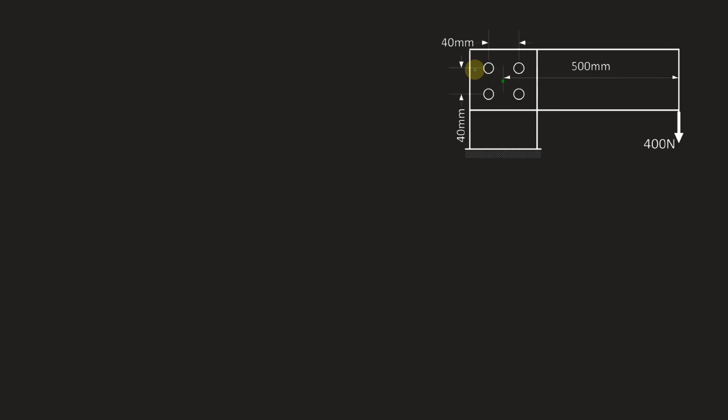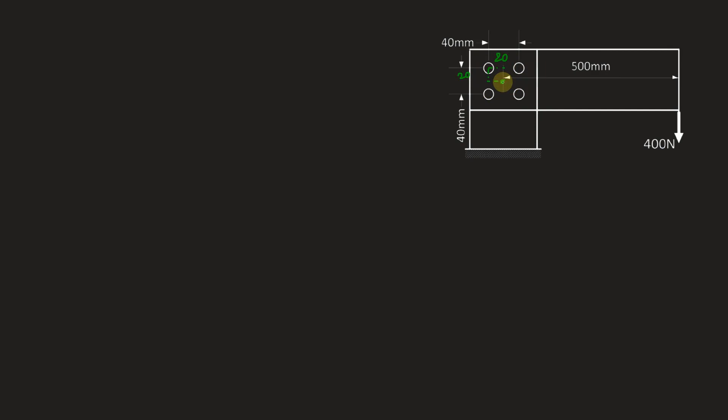Now in this figure, if we have to mark the CG of these 4 rivets, we can mark it here at 20 mm being this distance and 20 mm being this distance. We have just taken the half of the distance between the rivets that is given. So this will be the CG. All rivets are placed radially equidistant from the CG. Now from the CG of this arrangement of rivets, the distance of load is 500 millimeters, which is given.

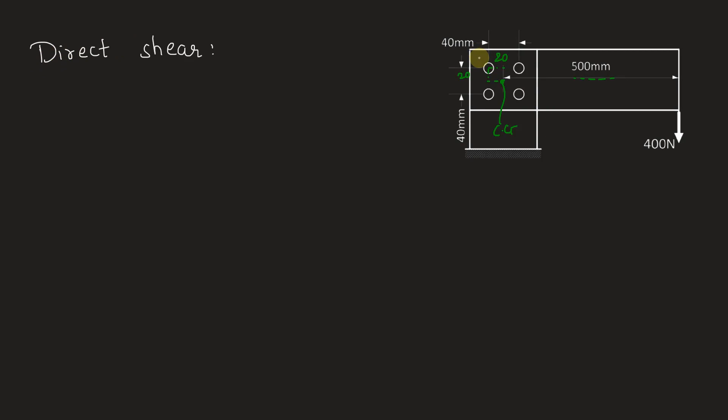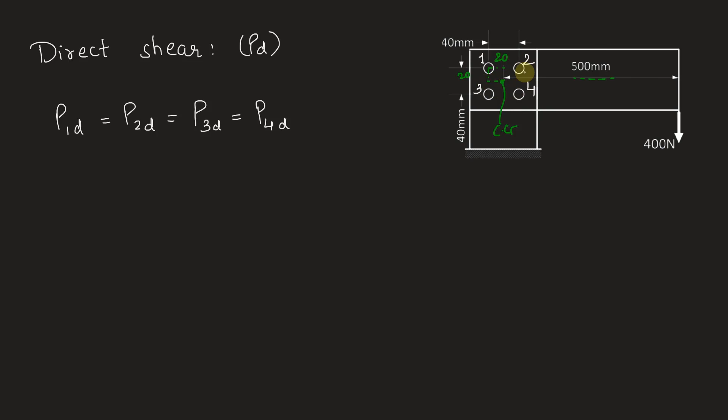So this load will apply 2 forces on the rivets. One is the direct shear and another one is the shear due to the torque created by 400 Newton, because this is at a distance of 500 mm from the CG of the joint. First we'll calculate the direct shear on each rivet. Let this be rivet 1, 2, 3 and 4. So if we write direct shear as PD, we have P1D is equal to P2D is equal to P3D is equal to P4D. All of the rivets divide the load equally among themselves. So we have this as 400 divided by 4, which is 100 Newton.

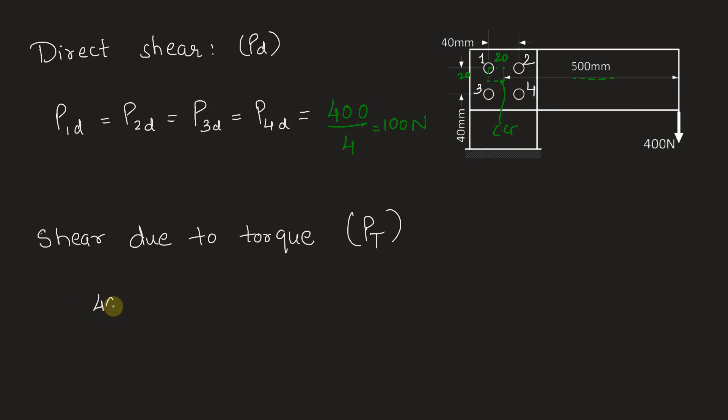Now comes the shear due to torque. Let that be PT. Now how to find this? We know that torque developed is 400 into 500 mm, which becomes 0.5 meter. This torque is also equally divided among all the rivets, but in the form of shear force that is acting tangential to this line connecting CG and the center of the rivet.

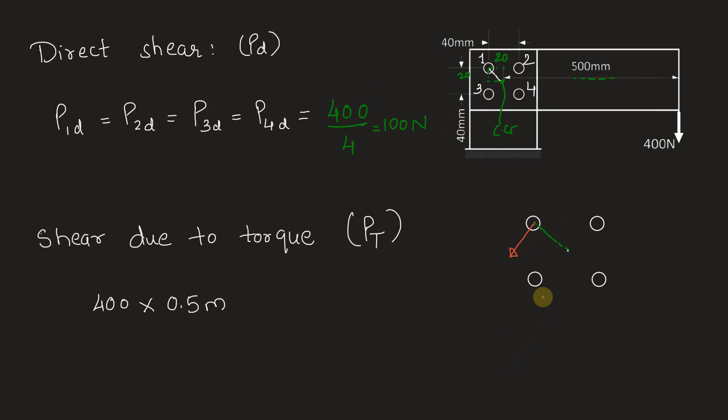So if we draw the assembly like this, and this is the CG of the arrangement, we can see that this is the line connecting between CG and the center of the rivet. So shear due to torque will act perpendicular to this line. Same is the case with all the rivets. Let's mark the direction of shear due to torque, and here it is. This torque is being divided equally in all rivets, so we can divide it with 4.

Every rivet will produce a force due to this torque acting on it, and this force into the radial distance will give the torque on the individual rivet. So we can write P1T into R1. So P1T into R1 gives us the torque that is taken by this rivet. So finding out P1T, first we'll find out R1. To find R1, we can use the geometry given here.

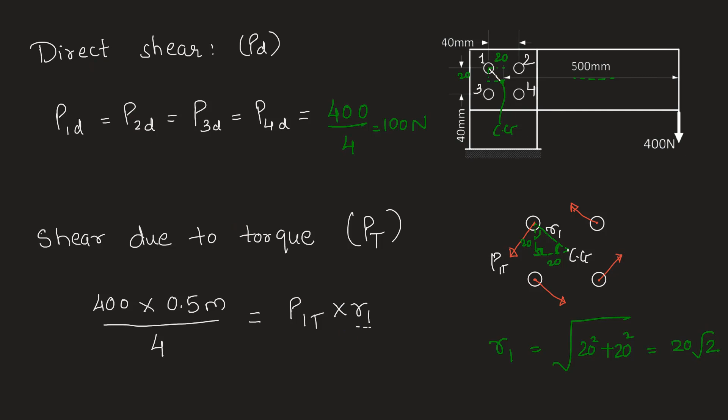So this is 20, this is given as 20. So this is 90 degrees. So the remaining angles will be 45 and 45. We can find out R1 from this triangle, which is root over 20 square plus 20 square, which is nothing but 20 root 2. So R1 is 20 root 2. Let's put it here to find out P1T.

We have P1T as, on this side we get 50 divided by 20 root 2. This value is in millimeters. We will have to convert it in meters because the torque we calculated is in Newton meter. So into 10 to the power minus 3 gives us P1T as 1767 Newton. This is the shear force due to torque on the rivet, and earlier we have calculated the direct shear is 100 Newton on each rivet.

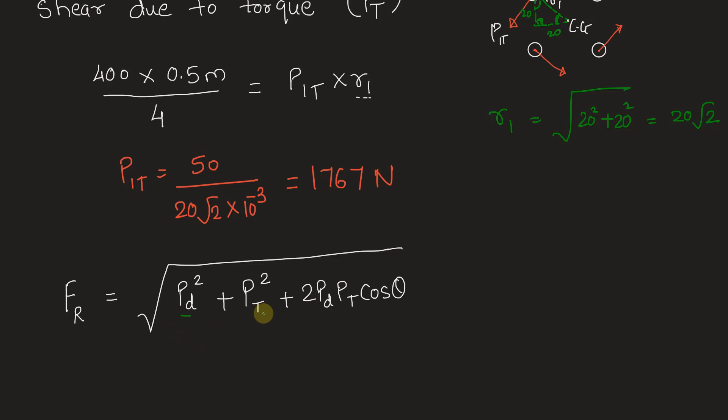So if we calculate FR, which is the resultant force on every rivet, it is given as root over direct shear square plus shear due to torque square plus 2 times direct shear into shear due to torque cos theta. This is the general formula for calculating resultant on any member if there are 2 forces acting on the same plane. Now we will have to decide. We have values of PD and PT for every rivet, but we don't have the value for theta.

How is theta calculated? For this rivet, if we plot a free body diagram here, the forces acting on it are, one is the direct shear P1D and another is the shear due to torque P1T. Angle between them is nothing but theta. If we are to determine theta in the first rivet case, how will we determine it? This angle is given to be 45 degrees and we know that this is 90. So theta is ultimately 45 degrees, because 90 minus 45 gives us 45 degrees. For first case, it is 45 degrees.

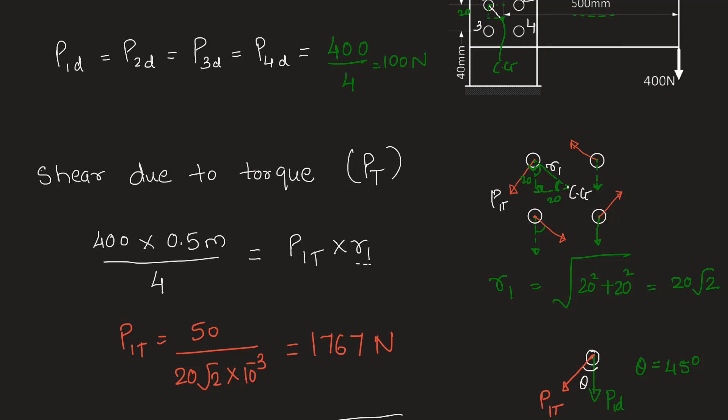For the second case, same thing, it will be 45 only. For the third case, however, it will be 90 plus 45, which is 135. And for the fourth case, it will be same thing, 90 plus 45, 135. So theta can be 45 degrees or 135 degrees. We are using cos theta in the resultant formula. So cos 45 will give us a positive value that will add up to the sum of these first two, and therefore we will get a greater number.

As opposed to cos 135 degrees, which is a negative value, which will subtract some amount from the sum of the first two terms. So this will give us a lower value, but 45 degree angle will give us a higher value. We have to find the worst case of shear, and that is why we will use theta as 45 degrees. So FR is equal to root over PD, 100 square, plus PT, 1767 square, plus 2 times 100 into 1767 into cos 45, which is 1 by root 2.

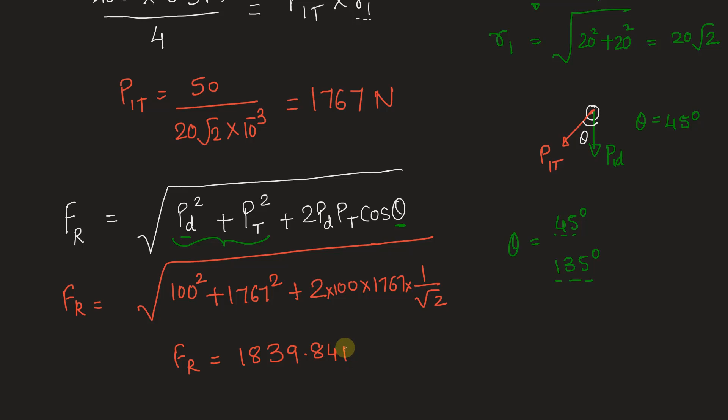So this comes out to be FR is 1839.84 Newton. Let's fill in the answer. Magnitude of load on worst loaded rivet in Newton is 1839.84 Newton.

To learn more about such eccentric connections of rivets, you can refer to the NPTEL video Lecture 13, Eccentric Connection, Load Lying in Plane of Bolted Joint, from the course of Design of Steel Structures. It is by Professor Damodar Maity. He is from IIT Kharagpur, Department of Civil Engineering.